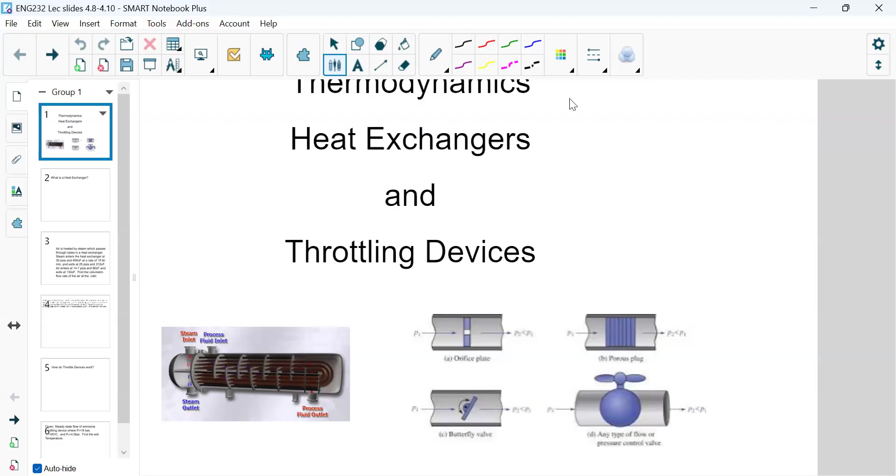All right, so you're gonna have to tell me. I thought we did a heat exchanger problem, is that correct? Yeah, we did like one. Maybe like that one. Okay, did we do this one with the steam?

Okay, I'm getting some no's in the classroom. All right, so let's go ahead and let's see. Got a table note, so do I have the table in here? So you guys go ahead and get the problem down and I will pull the table for this problem.

Let's do a freeze on that. Okay, I stopped sharing for just a moment. I will be back. I'm just pulling up this steam table and it was freaking out. Zoom gets upset if I move away from the Zoom screen.

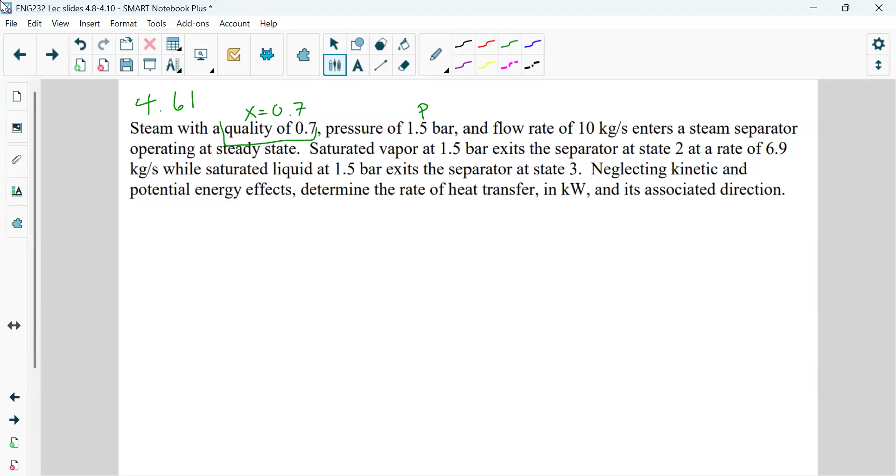Has a pressure of 1.5 bar and a flow rate. The word flow rate, okay, pressure is P, but the word flow rate, what does that mean? What are we looking at then? We are looking at M dot.

Enters a steam separator operating at steady state. Saturated vapor, now do we still have a quality? No, because it's saturated vapor, it's 100% vapor. 1.5 bar exits the separator at state 2 at a rate of 6.9. So this is another M dot.

Saturated liquid, meaning we're all liquid, correct? Exits the separator at state 3. Neglect kinetic and potential energy. Determine the rate of heat transfer, so we're going to want to determine Q dot and its associated direction.

So what's happening here? Let's go and draw a picture. I'm going to draw it like this because I've got steam leaving and I have liquid leaving, and then I have a mixture entering. So here at our entrance, what do we know?

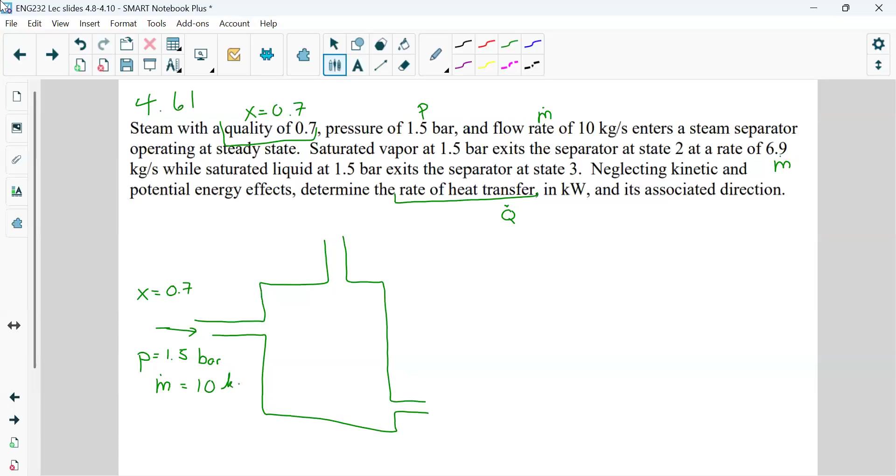Well, we know X equals 0.7. We know we have a pressure of 1.5 bar and a flow rate of 10, that's in kilograms per second.

So that's what's coming into it. Now what it's doing is separating it. So when it's separating it, we have the vapor coming out. So this would be my vapor then.

Okay, so a mixture is pouring in, vapor is coming out, and we know that pressure is 1.5. We'll call this 1, this 2, and this 3, based on how the book has things labeled. And we know this: M dot is 6.9.

When it says state 2 and state 3, that just means exit 2 and exit 3? Yes. All right, then what's coming out of here? This is strictly liquid.

And we're told that it also has a pressure, so we'll label this pressure 3 as 1.5 bar. We'll call this pressure 2, and we'll call this pressure 1, just so we can keep them straight.

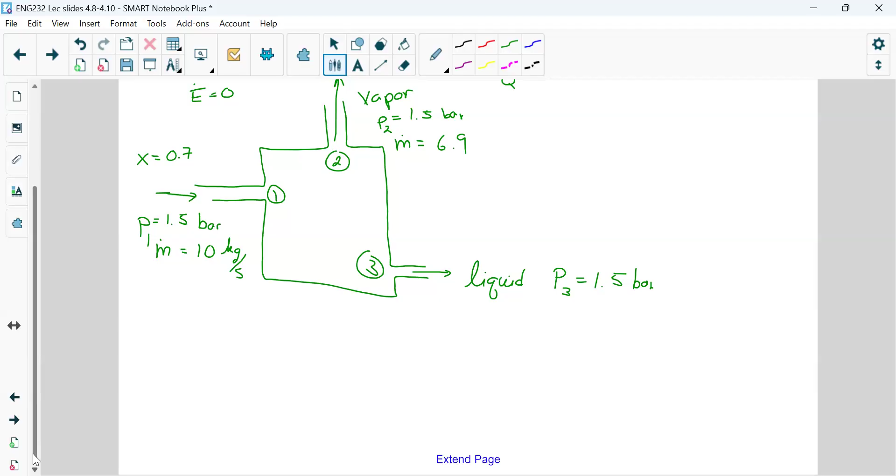So let's go ahead and write out our equation. E dot is going to be my heat, which is what I'm solving for, minus my work. And then I'm going to write what I have here, because the author plays games with these signs, it drives me crazy. Oh, that needs to go on the inside.

All right, let's talk about this and we can then move forward. So we already said we're at steady state, so this is going to go to 0. Is there any work being done on this system? A resistor, a paddle? No, so this is going to go to 0.

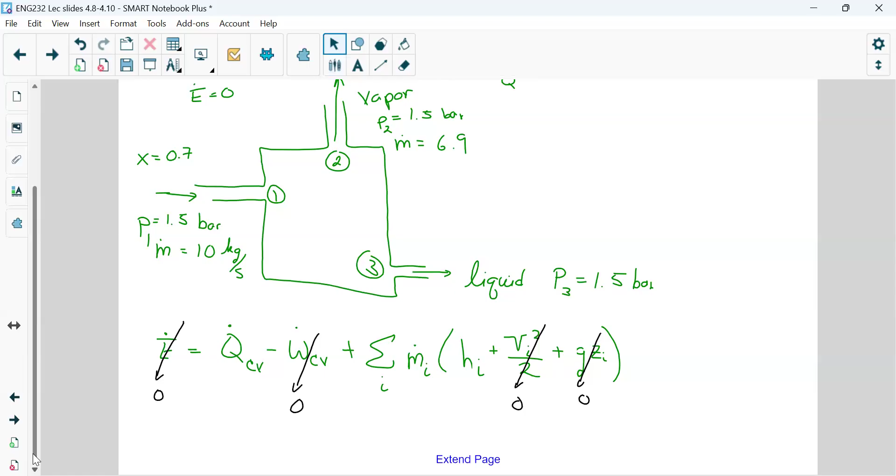We were also told there were some things we can neglect. What can we neglect? Kinetic and potential. So both of these are going to go to 0, correct? All right, so let's see what we have left. We have left Q dot CV, that's what we ultimately want to solve for.

By the way, what does CV stand for? Control volume? Controlled volume. What did I hear? Ben, what did you say? Anthony, what did Anthony say? Didn't say anything. Constant volume? Constant volume, okay, I thought I heard impossible. I said constant too, but I thought it was wrong. If I turn my hearing aids up any louder, I'm just going to put them on a different setting.

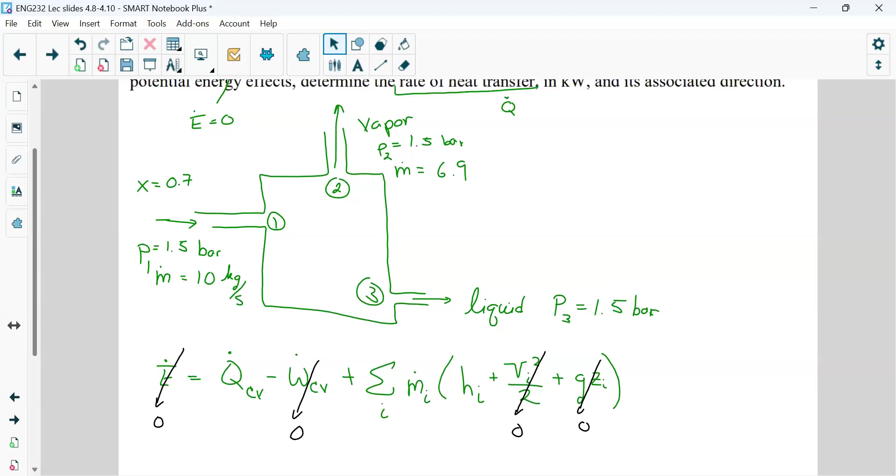All right, so let's go ahead then and talk about what's going in and what's going out. So coming in, when we now deal with this scenario, what do we have? We're going to have the rate at M1, and then we're going to have the H at 1, correct? And that's what's coming in. We're going to subtract what's going out, so we're then going to have the mass rate at 2, and then we're going to have to deal with our mass rate at 3.

Some of these are going to be easier to go after than others. Hey, I took attendance, so check in with me at the end of class.

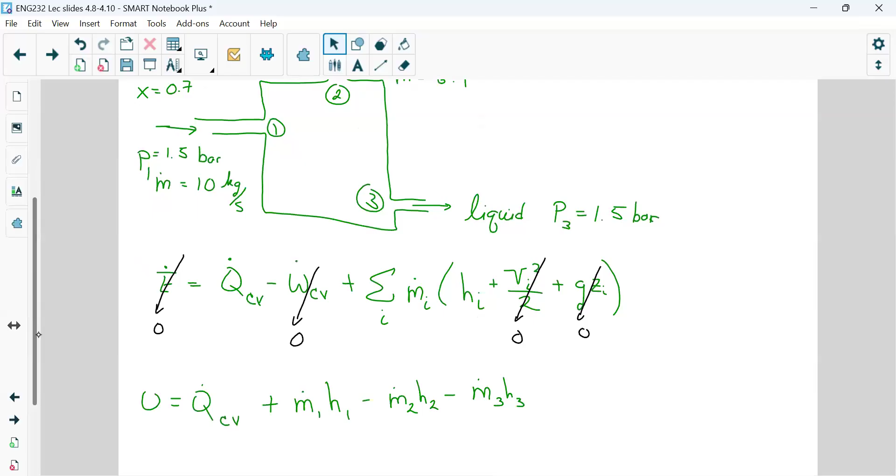All right, we know it's got to be leaving the system. So it should be negative then, correct? Yeah, but let's solve it first. If you just keep your signs consistent throughout the problem, we're gonna solve it, then they'll work out at the end.

All right, what else do we know? Well, we know conservation of mass, don't we? So that means M1 has to equal M2 plus M3, correct?

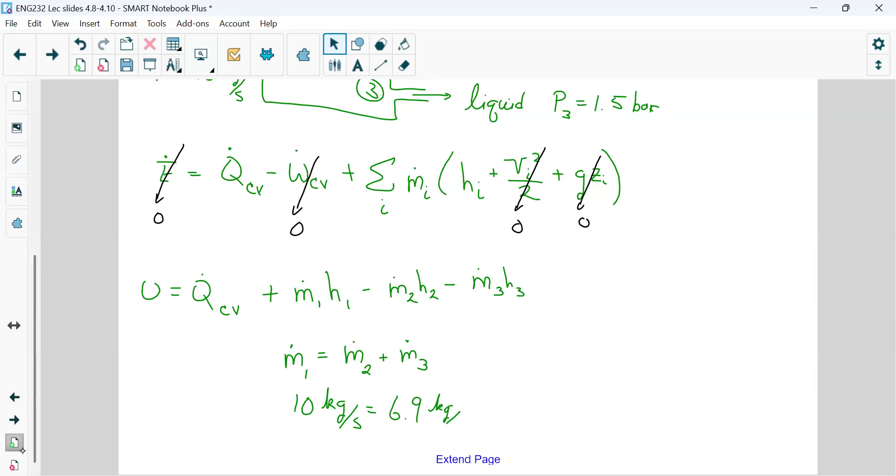The H's, we're gonna get off the table. All right, so let's figure out what our M3 is gonna be, because that was not given. So M1 is given to us as 10, and this is in kilograms per second, is then going to equal... 6.9 kilograms per second plus M3.

There is a dot there, I was told that doesn't always show up virtually. All right, so if we subtract them, then M3 is going to be 3.1 kilograms per second, correct? Yep, all right.

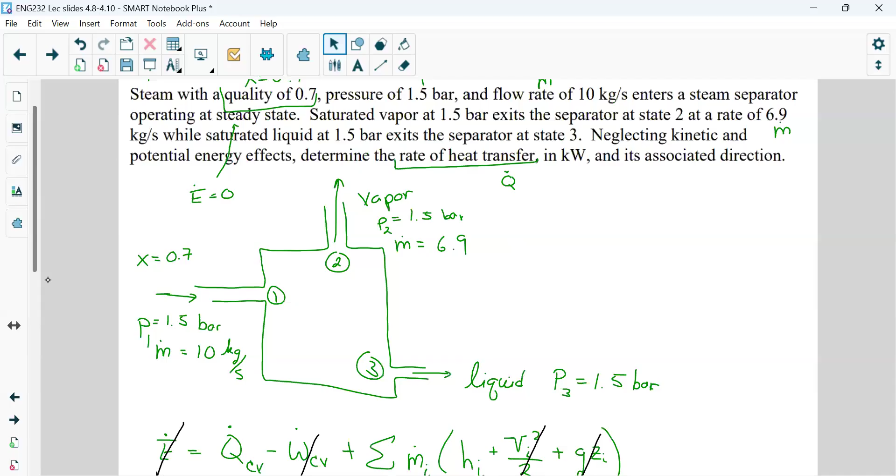So let's go ahead, now we have M3, we can go after the H's. Everything is happening at 1.5 bar, isn't it? So if we look at our property at 1.5, our pressure here is 1.5. We have our volumes, but let's go over here because this is what we care about. Here are the H's, correct?

The 461 is my fluid. 467. 467.1, right? That's gonna be my fluid.

Now, this is why I wanted us to do this problem. Let's talk about what H is and what this means here. All right, so physically, H is enthalpy, which is how much heat it can absorb before it changes state. When we do this, because enthalpy is a little different, we're gonna wanna use this as our upper side for the in-between.

So this is going to be H3, which is 3, that's the stuff coming out the bottom. This is gonna be H2, that's the steam. All right, I'm gonna have to use these two numbers because H1 has to fall between those two numbers. And that's because of our X, right? That's because we're given X as quality.

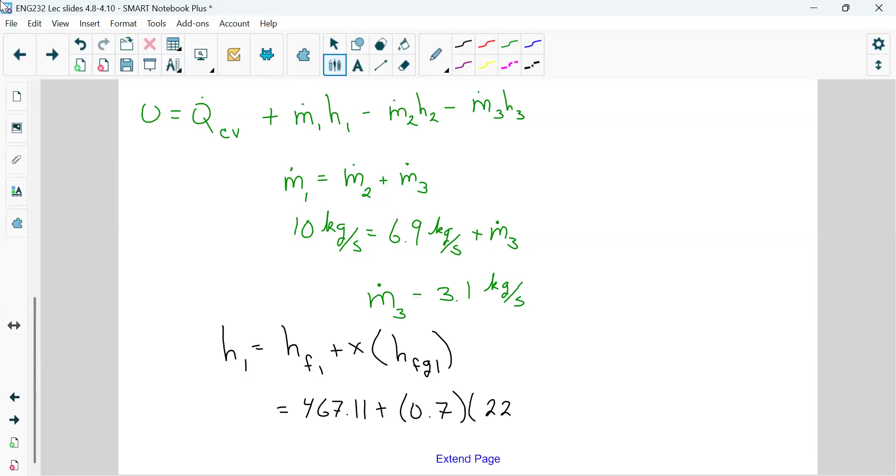All right, so the fluid was what, 4? Did anyone write the numbers down? 467.11 plus my X was 0.7, and the other one was 226.5. Try it again. 226.5, there's two 2's, 0.5. All right, excellent.

All right, so plug it in your calculator, what do we get for H1? Like 2025? 2025.66. All right, 2025.

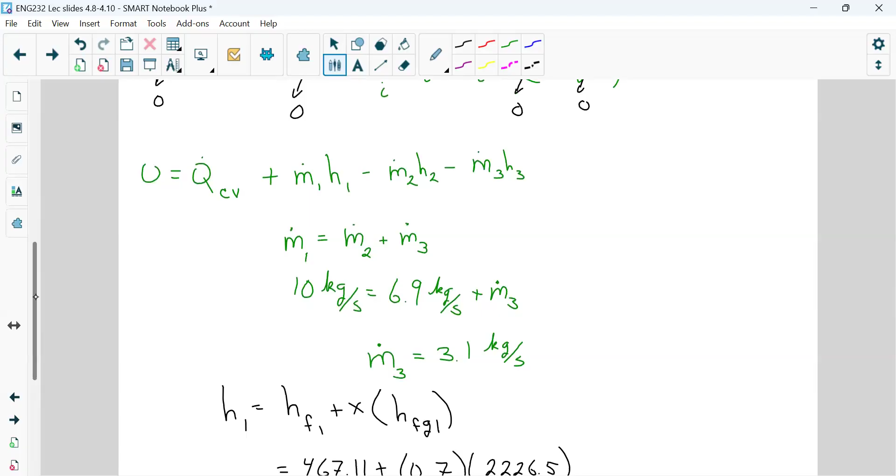All right, so let's head back to our equation. We're then gonna have, we know our M1 is going to be 10 times 2025.6. We're then going to need to subtract our M2. Now, our M2, we said was strictly vapor, so we can pull that off of our chart, can't we? So that's gonna be the 2693 number, correct?

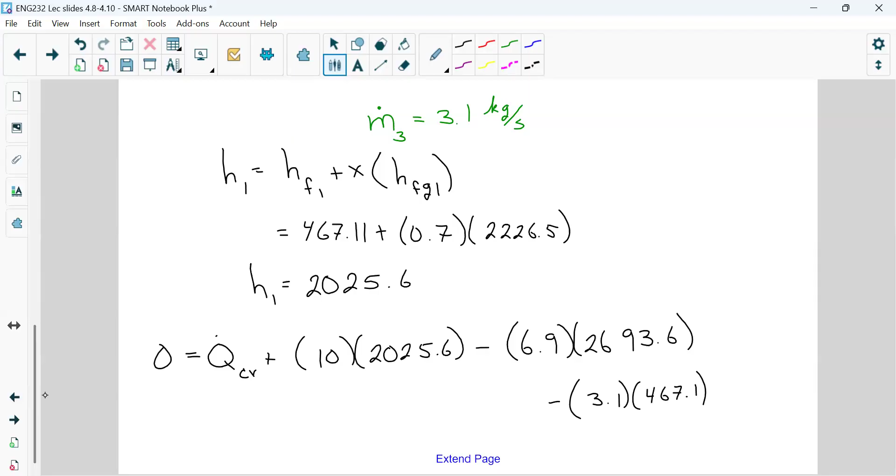All right, we're then gonna have our fluid number, which is the 467. So this is then gonna be 3.1 times 467.1. Nice and loud, what's wrong? I'm confused where that 2693 came from. It's our HG, right? Did I write it wrong? Oh, it's 2693, oh I didn't see that. Okay, oh no, I'm okay, yeah, I'm okay, all right.

So what happens when you plug this in? I'm gonna move this to the other side. Right, plug that all in, and what do you guys get? Minus 40,291. Oh, the first one's a plus? Okay, I did that wrong. Okay, because I'm like, that's kind of crazy. Yeah, the first one's a plus because it's going in, the other ones are minuses because they're leaving.

Anyone get 222.7? Gabriel, is that what you got? I got 222, I think I might have... Oh no, that could be it, could be a rounding error on my part. Anyone else do it? 222.719. Oh, okay.

All right, now this ended up being positive. We're gonna move that sign over. Ben was trying to figure out the sign before we did the problem, which you could use as a check. By the way, units on this are gonna be kilowatts.

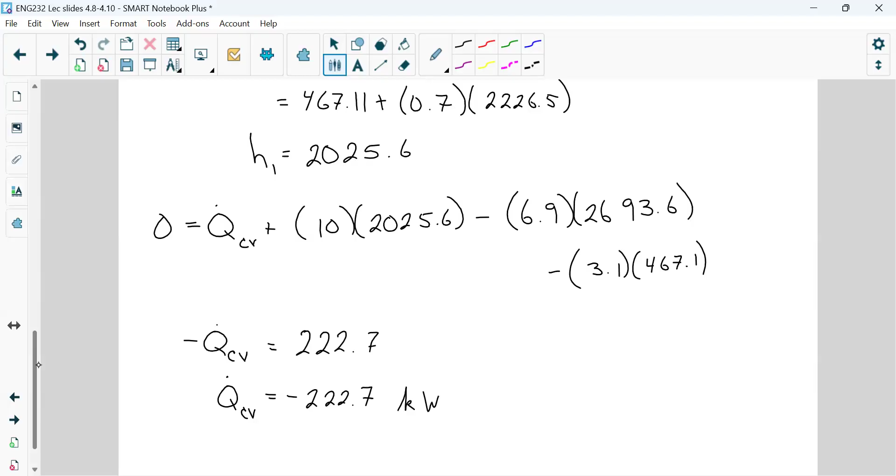Right, questions on the problem? Yeah, I do. Why in that form to find H1, why do you have to add the enthalpy of the fluid plus the gas mixture? Okay, so, I should have printed this out because you guys make fun of me about this.

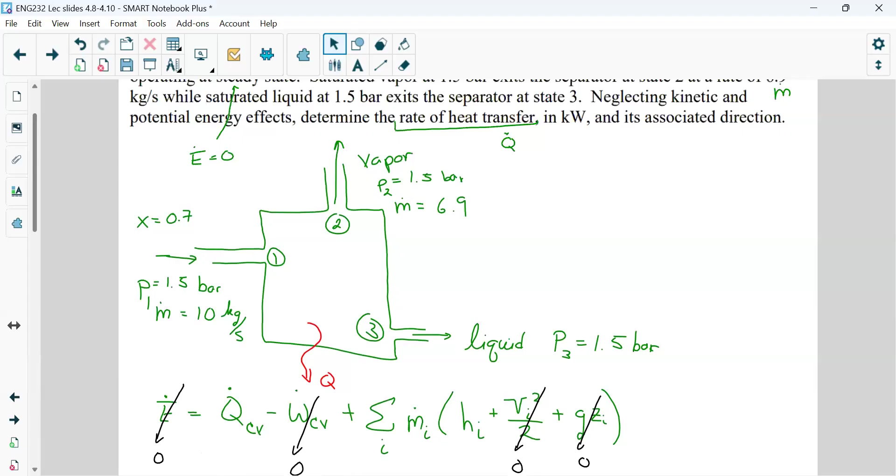Quality, right? That's gonna be H1 minus... H fluid, thank you, okay. H gas minus H fluid. So that's why. The table gives us this, it gives it as what's in the parentheses, right?

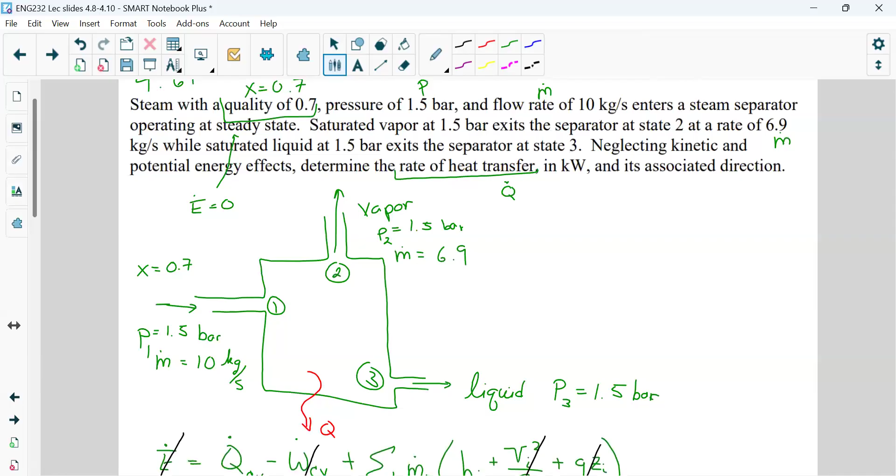Okay, I get it. So on that note, we said that HG and HF were H2 and H3, right? Yes. Okay, I was just making sure. So whatever pressure it is, well, the thing about the pressure is if the pressure had changed, this problem would be a lot more exciting. But the pressure is constant throughout, right, Jeremy? Right. So because of that, we are literally only dealing with this particular table.

So if it's pure liquid or pure vapor, you just use those, but you need to find the enthalpy of the mixed region basically. Right, we don't know where we are in the mix. Right, that's why we had to use the equation to solve it using the quality. That makes sense.

Right, and that X works for everything on that table, right? Like if we needed internal energy, we can use that X value too. Well, what's awesome about the quality is it works, and hopefully we're gonna get into this today. Yeah, we will. All right, it worked, we found it worked with volumes, didn't it? We also can use it for internal energy. We also can use it for enthalpy. We're also gonna be able to use it for entropy.

So X works no matter what quality, or no matter what I can't find the word, it'll pop into my brain. No matter what property we're looking at.

Yes. If we weren't given the mass flow rate for 2, could we have used the quality to figure out the amount of steam and just assume that would be the flow rate? Knowing that's gonna be about 70% steam. Yeah, okay. I would be careful about doing that, but you could do it that way, you could think of it that way. It's gonna work out.

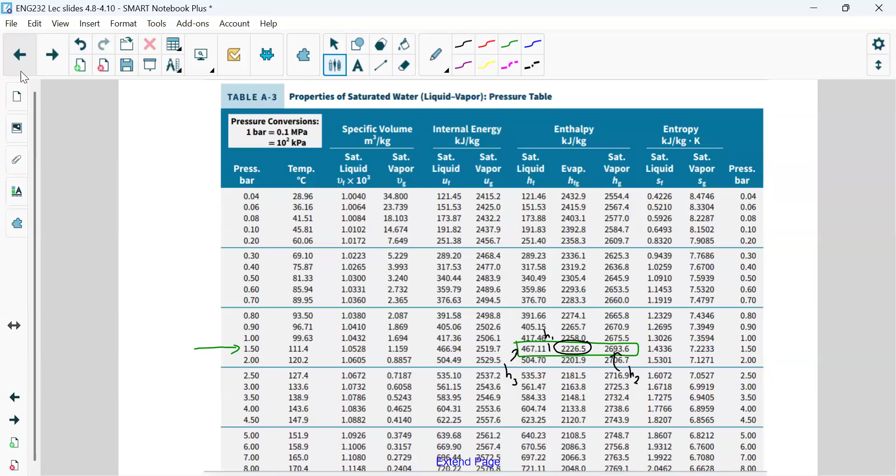Okay, all right, so, like, I understand how to find them, but I don't know when and where, and if they can be used other places. Okay, so this is where I think the biggest confusion for the tables come into play. And that is the fact is you need to know where you are.

Here, you're at saturated liquid, meaning it's all liquid, right? Here you have a mixture. Here you have saturated vapor. What I tell students, and this works most of the time, is start, if you don't know which table to use, start with the mixture table. If what you're looking at with what you're given falls outside that mixture table, then figure out are you vapor or liquid, and then go use that table.

Yes. When you're saturated liquid or saturated vapor, you're on the line. Well, yeah, when you're saturated vapor, you are on this line here. So that's your VG. Okay, unless, and this is why you have to look at it.

Let's go back one. Let's say we're given volume and our saturated vapor at 1.5 is 1.159 for water. Let's say it's at 3. Can I use this table? No. This table only works when the volume's between 1.05 and 1.159. Or if you're given internal energy, these are the internal energy values this table works for. Or if you're given enthalpy, that's the enthalpy that this table works for.

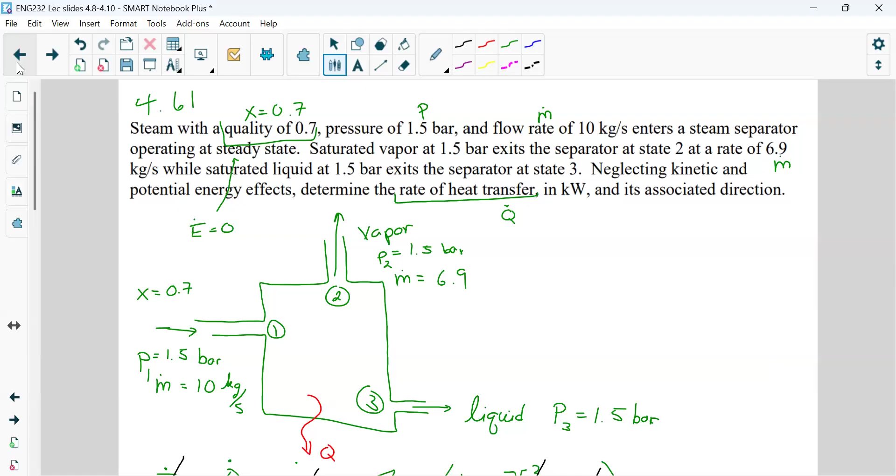This problem starts, Gael, by telling us we're given a quality. So that automatically means we're going to be on the A2 or A3 steam tables. Okay, we're not on the A2 because we're given pressure instead of temperature. Yes, Valerie, I think it's also important to figure out what equation you need to use to solve it, because if we know we needed the equation you wrote down, we know, oh, I need to look for enthalpy in the table. Right, so unless we're dealing with ideal gas.

Yeah, and things are gonna get a little different, hopefully today, maybe not. Entropy is gonna be different. We're looking at this equation. Yeah, but earlier in the semester, I was using change in internal energy equals Q minus W, because then you're looking for U in the table. So, correct, it depends on which formula you're using. Right, but what's the difference between those two equations?

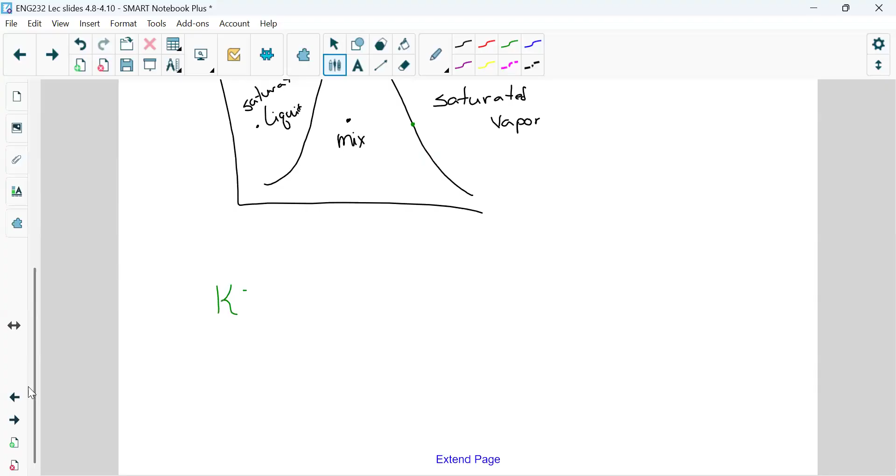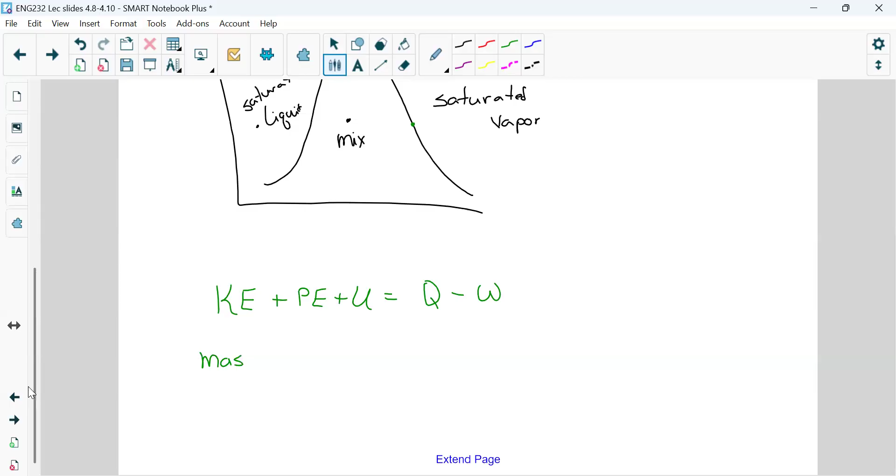No mass moving out of the system or in the system. No what? Not no mass. Mass, right? Mass flow rate. If we have this equation, nothing is moving. So in the beginning of the semester, stuff didn't move. All right? If we're told mass is flowing, then we're going to have to use this equation.

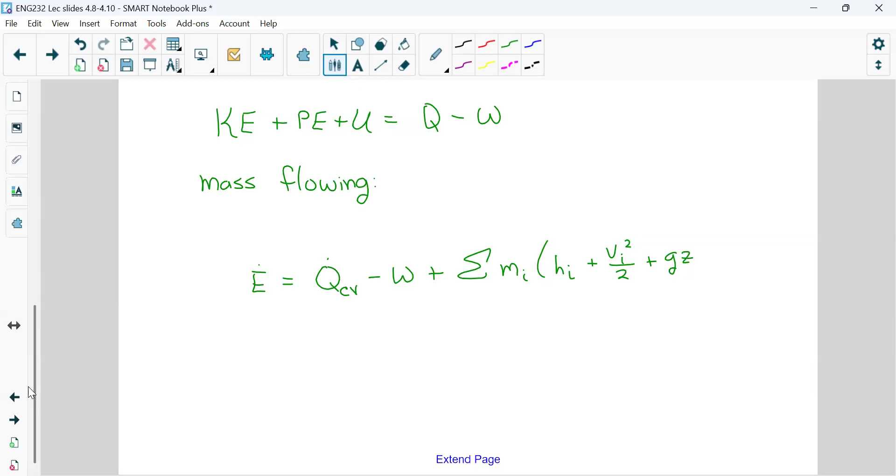Let's go back to our open, closed, and isolated systems. Closed and isolated systems won't have a flow rate, so yes, it does go back to it. All right, if it's closed or isolated, it's gonna have to use this, correct?

Because mass is not moving in or out. If it's closed and isolated, then what else? If it's adiabatic or isolated, then Q is gonna be 0. All right, so that's the difference between using these two equations.

Does that help? Gael, does that help? Honestly, not really. I know what tables to look at, and I know when to use which formulas.

I think what trips me up the most is like, for example, if we have the equation on the bottom. I don't really know how to explain it, but I remember in the exam also I didn't know whether to...

Please do not discuss the exam. I have a couple of people who asked to take it late, and since I wasn't in town, if there is a problem with the exam, Gael, we're gonna have to meet in office hours for that at this point. I wasn't gonna go into specifics of it, but if that's okay, we can talk about it generally. Yeah, we can talk about it in office hours. Okay, never mind then.

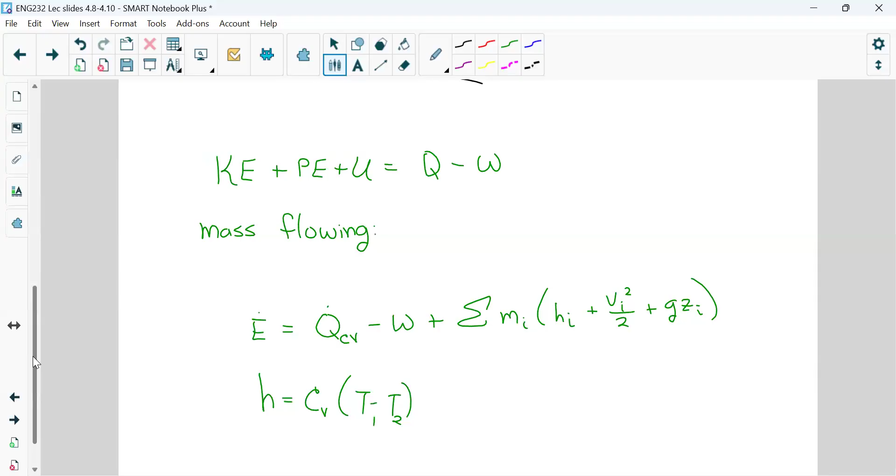I remember when I was doing the homework, I would get tripped up also on when to go all in using the formulas or just keep pulling values out of the table, because I felt like it just made sense to pull values from the table and plug them into whatever formula. But in some cases I could also solve for the value I was missing, so I wasn't sure what to do. That's my biggest confusion, when to pull values and what values to use and what not to use, stuff like that.

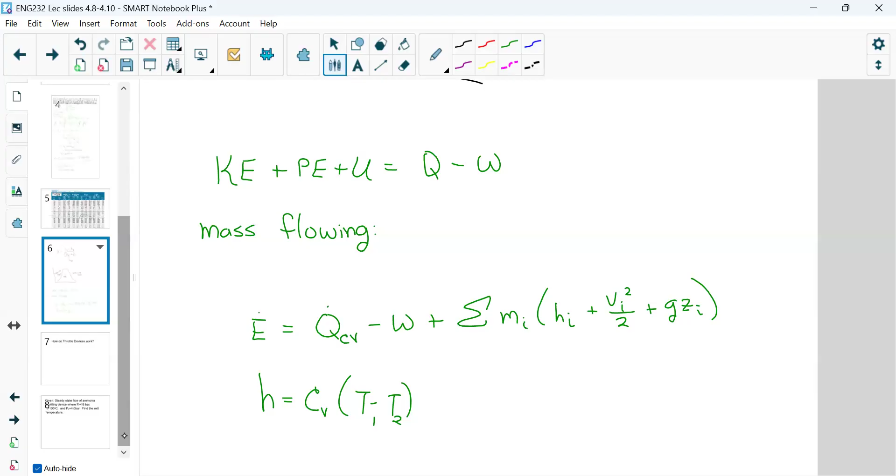I think we're gonna have to sit down and look at some problems in particular in office hours if you want, because I really kind of need to get to this today.

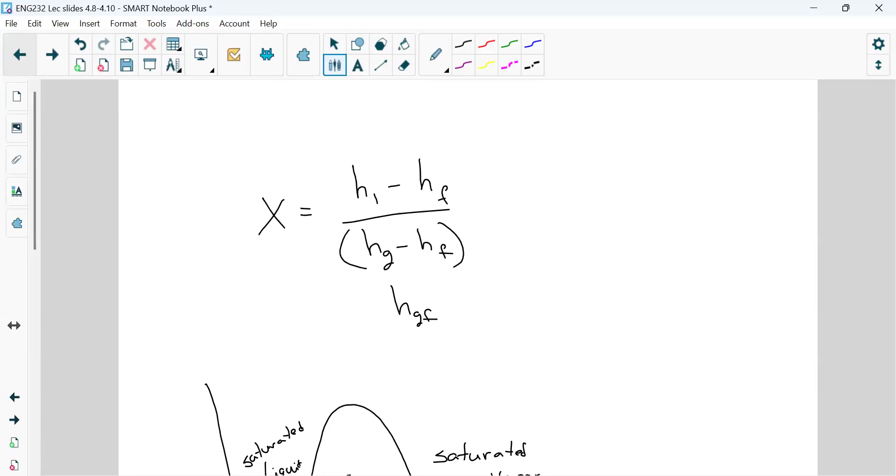Let me check real quick. Yeah, that's right, CV is U, CP is H. I don't even know where I wrote it down. It's right, okay, so it should be C sub P, meaning we have a constant pressure, but we're looking at specific heat - if you're given specific heat, you can calculate H and U.

If you're not given that information, pull it from the table, or if it's something that isn't on the table because it's not a fluid or a gas that we have information for, correct?

All right, so let's talk about throttling devices. Throttling devices change what? What are they gonna change? Velocity, they're gonna change that flow rate, aren't they? Right, so they do not provide energy.

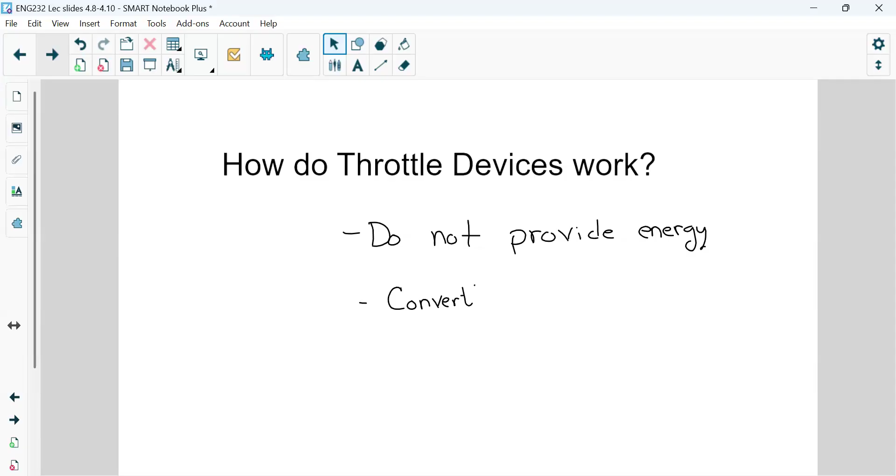What happens is, and I'm gonna use the word convert, which is not the best word to use but we'll go with it, they're gonna convert pressure energy right into thermal energy.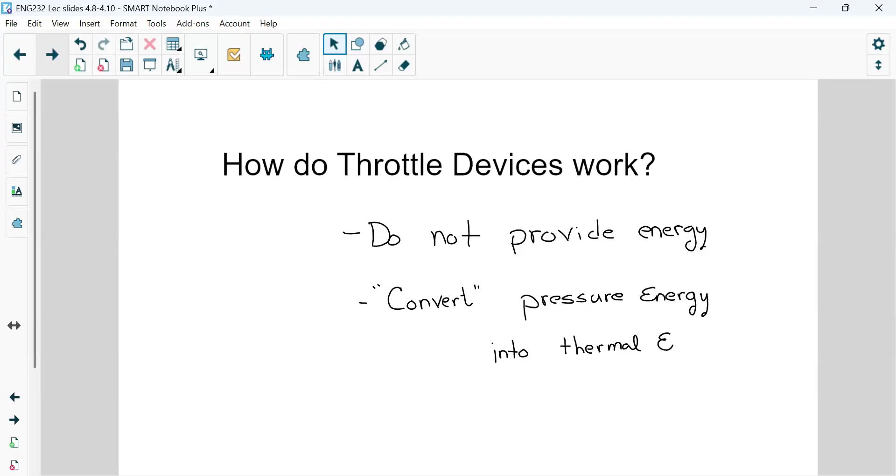This is the biggest key. This is the key words you're gonna look for when you do a problem to tell you it's a throttle device, right? Large, irreversible, pressure drop. The keyword there is irreversible.

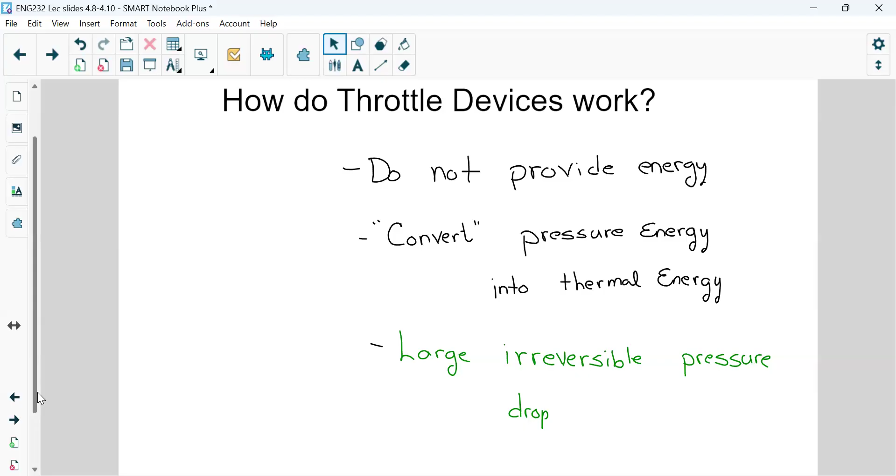Got a problem and it's missing the keywords, but that's okay, it tells us it's a throttling device. All right, so I need to grab a table for the problem. We'll talk about why we grabbed a table for the problem based on what information we have. So go ahead and get this problem written down.

I do not have it in my notes if this came out of the book or if I pulled it from somewhere else. Okay, so give me a 7 when you get this down. As I said, I need to grab a table, and I'm gonna grab the table for this.

First off, it's ammonia. So Gael, let's walk through this. If it's ammonia, am I gonna use any of the steam tables? Yes or no? Wait, no, not a steam table, I'm not gonna use a steam table. I'm gonna have to look for a table that is what? All right, I'm gonna have to look for a table that's ammonia.

Actually, you know what? Let's walk through this together. Let me know when you have this problem. Let me know when you have this problem down.

Is this kind of like a diffuser because the pressure's dropping? No, because the pressure's dropping due to something blocking it. On a diffuser, the pressure drops because you have a change in surface area.

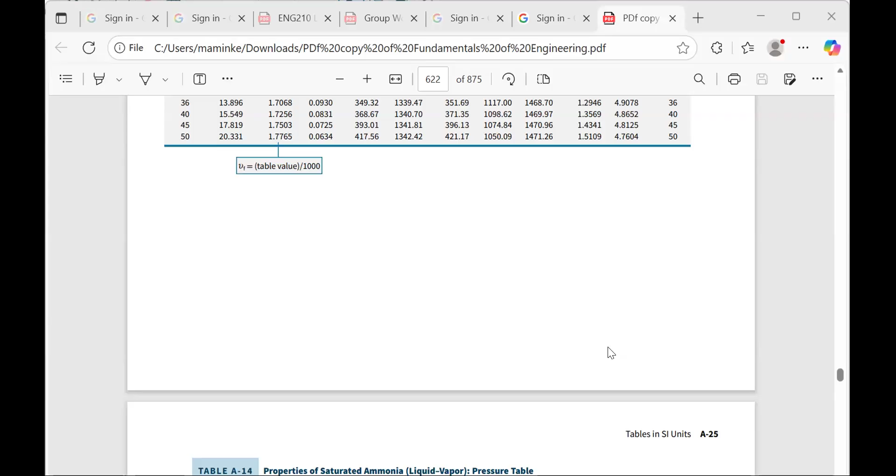Based on what you're saying, wouldn't it be more like a nozzle? Because you're having a change in area. That's correct, it's just a different case—you still have a change in area. Physically, a nozzle or diffuser behaves differently than a throttle valve in the field. You can look at them as being the same for this class, but when you take fluid mechanics, they'll be different.

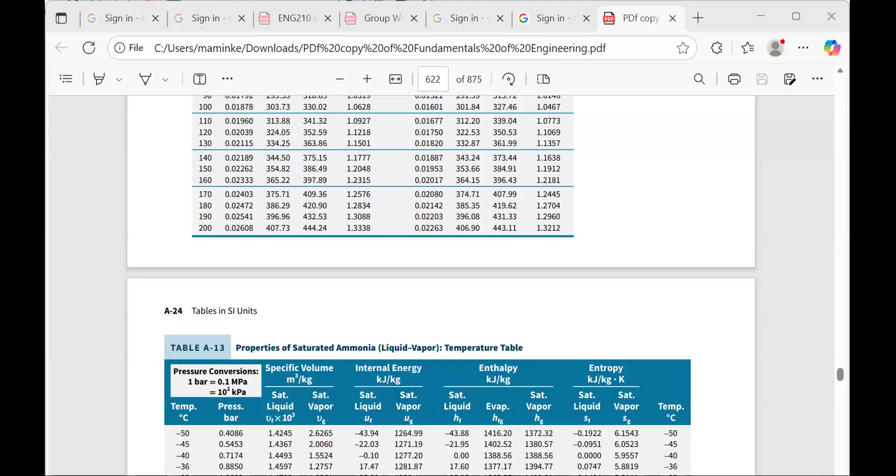All right, first thing, Gael, are you with us? This is for you. Yes.

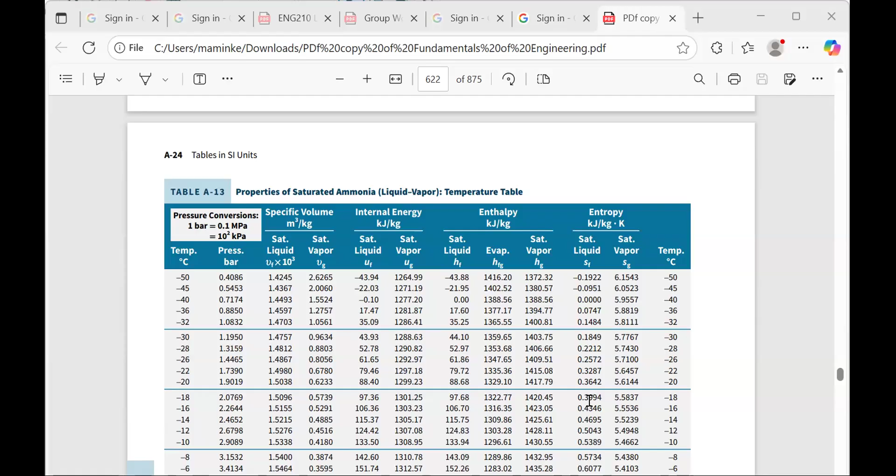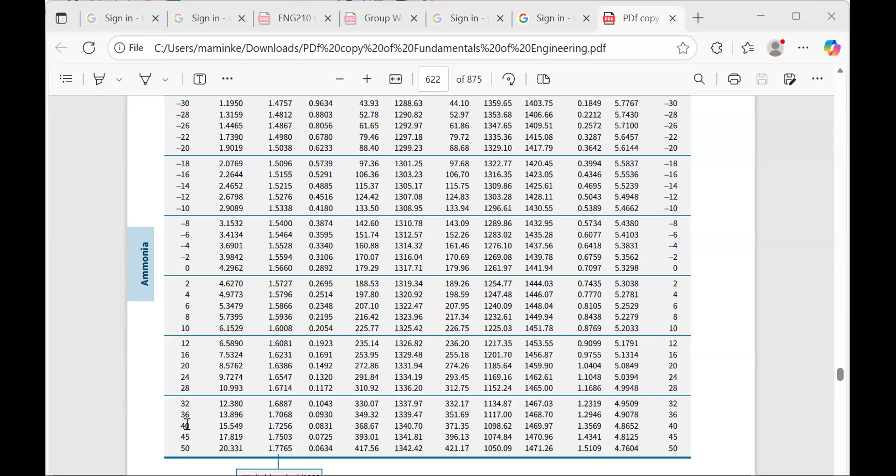So first thing is I have ammonia, so I need to go to my ammonia table, correct? I'm given two pressures: we're going from 16 bar all the way down to 4 bar, and in addition we're at 100 degrees C. So we're looking here, 16 is roughly this number—would you agree for a pressure? And we're at 40 degrees... that's going to be a problem for me, isn't it?

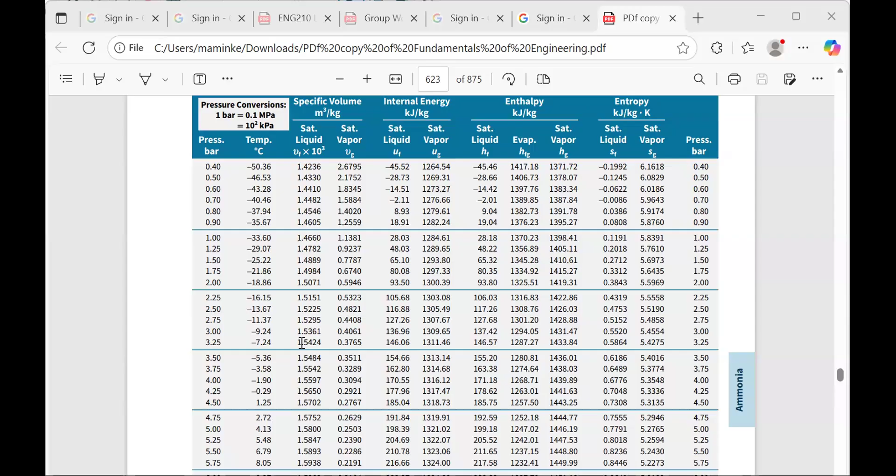If I go to the pressure table here, at a pressure of 4 bar, this is negative 1.90—do you see that? So if this is my pressure and that's my temperature, and I'm at 100 degrees C, can I use the mixture table? No. Am I going to be a liquid or a vapor at 100 degrees C? So superheated ammonia, right?

If I have a pressure, now we're looking at this pressure, 2.5, 3—here is my 4 bar, correct? So here is what happens at 100 degrees and 4 bar, and at 16 bar and 100 degrees. Yeah, 4 bar is the exit. Okay, so 16 bar—here we go, 16 bar and 100 degrees. Right, we're coming in here, aren't we? All right, I'm going to pull this table and put it on the other slide.

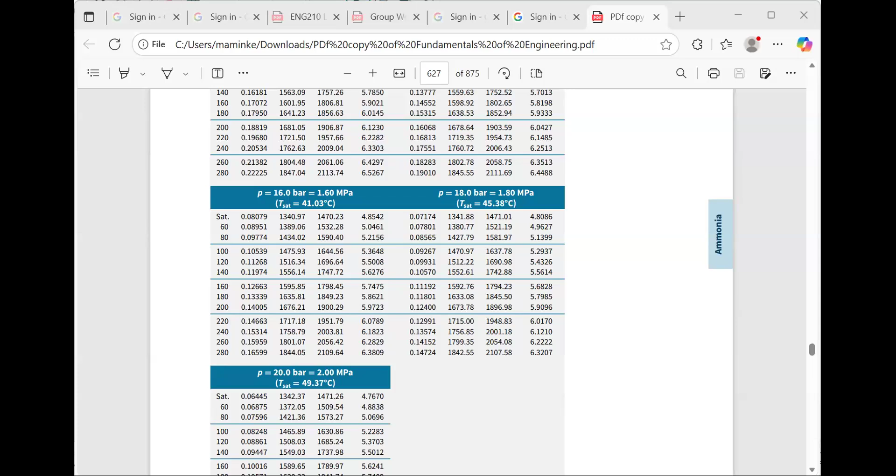Did you understand the logic I used? Maybe that's part of the problem—you need to use logic to figure out where you're going to be with these. It's not just a formula you can use. So let's go back to here. Let's reshare with the Zoomers.

So coming in, we know we're at 4 bar and we are at 100 degrees C. No, 16—I'm sorry, this is actually a poorly worded problem. That's fine, we're at 16 bar coming in, and we are here at 100. So what is my H going to be then? 1644—all right, it's going to be that 1644 number.

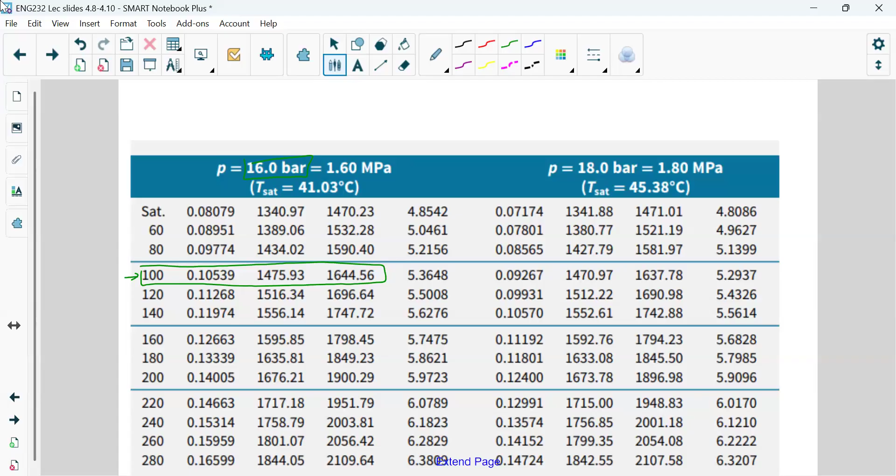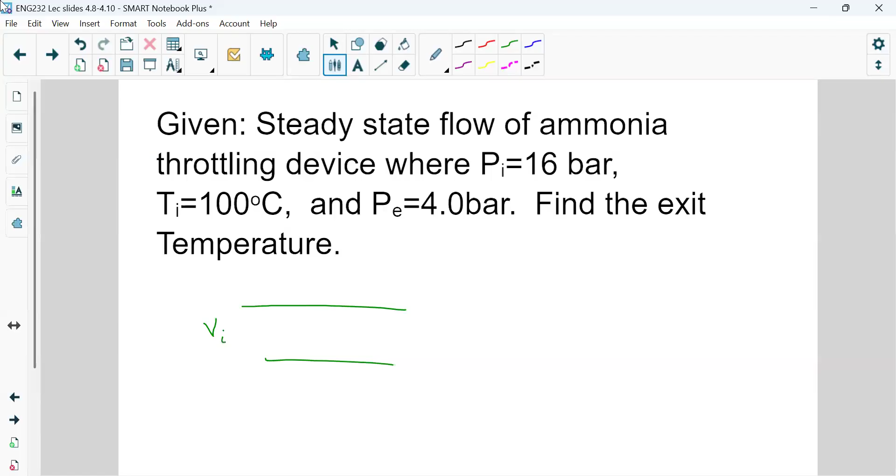Okay, let's go back to our problem and talk about what's going on here. We have a throttling device. We have stuff coming in, something happening here causing it to throttle, and then stuff exiting. Velocity in, velocity exiting—we have information about what's coming in. This is 16 bar, temperature coming in is 100 degrees C. What else do we know that's coming in? Off the table we can get 1644.56.

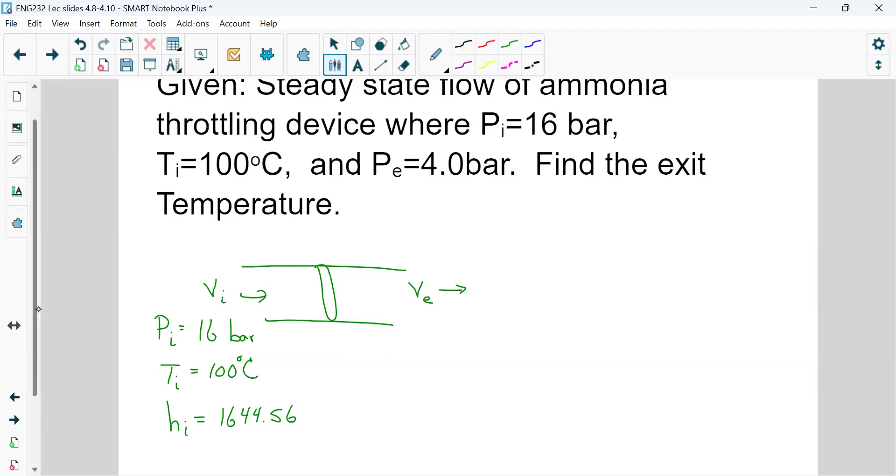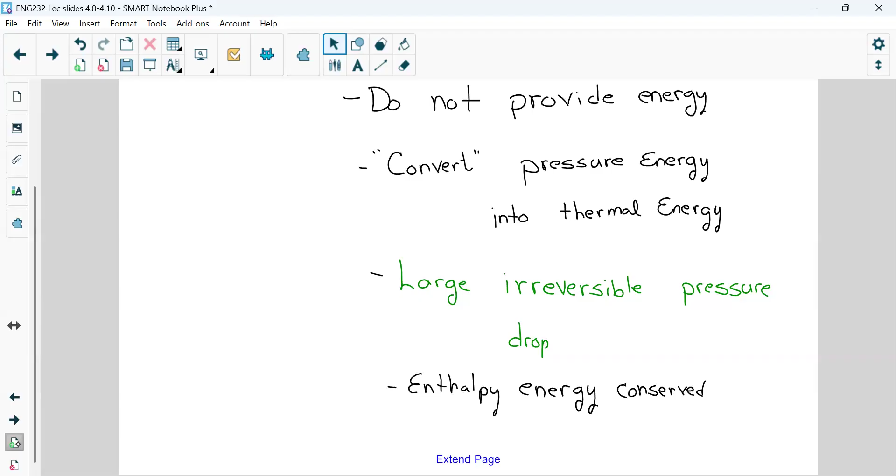What I should have written on the previous slide, which I didn't, is that when we have a throttle device, internal energy is conserved—sorry, enthalpy is conserved. Why is that? It's because the pressure energy is being directly converted into thermal energy, so your enthalpy isn't going to absorb any of that energy—it's going to be released as heat.

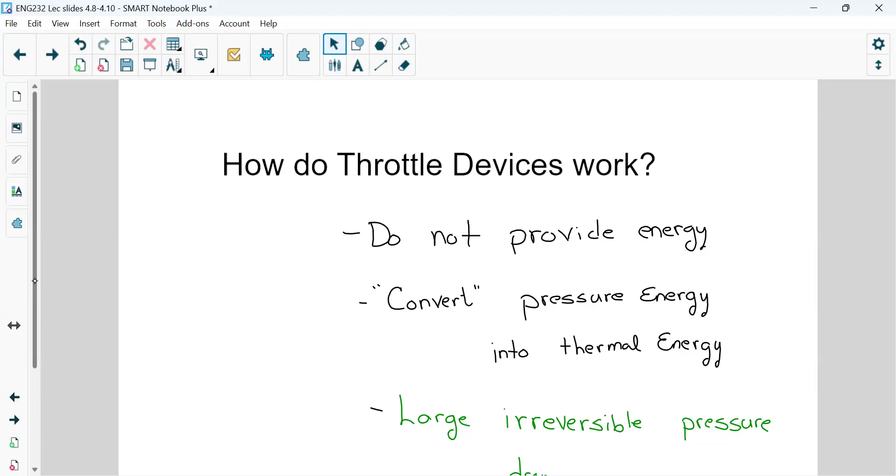A throttle device is literally just a device with an opening or adjustable valve that can adjust pressure and speed, right? So these are our throttle devices. Is my thumb on a hose a throttle device? Yes, when you put your finger over a hose, you're creating a throttle device—didn't you have to do that for one of the pre-class quizzes? When you step on the gas in your car, you're also changing a throttling device, because the valve opens to let the gas out—unless it's electric, in which case it's just electric.

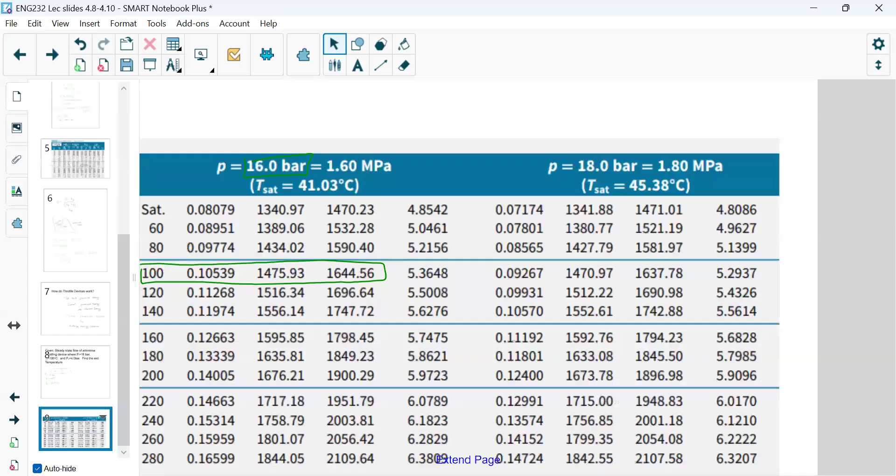All right, so my H is conserved. Because of that, I know my pressure at the exit is 4 bar.

I don't know the temperature at the exit, but the enthalpy at the exit has to be 1644.56.

I thought this was a much more difficult problem, so I actually did the analysis to figure out the exact answer, because this isn't going to be exact on our chart. So we know we're now at a pressure of 4 bar.

If we go back, I'm just going to grab it. I'm not switching slides, so hang on, Zoomers, I know you can't see what's happening. All I'm doing is heading up to 4 bar.

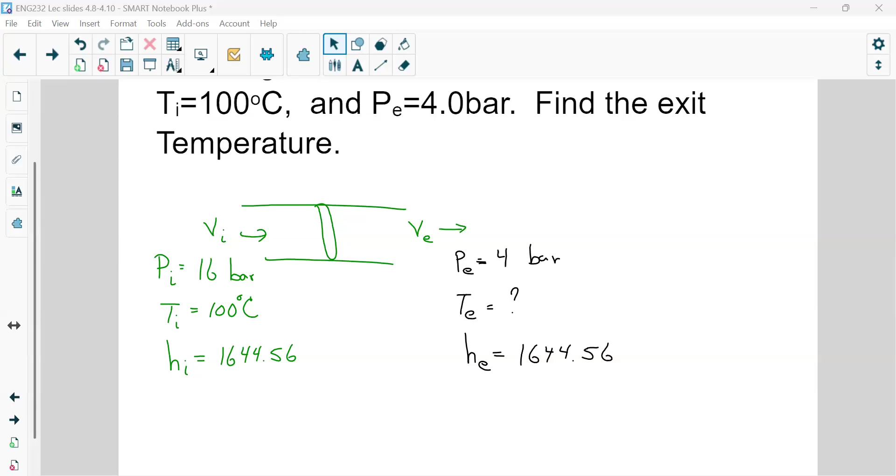We should keep enthalpy where it is, the internal energy's going up, the volume's going up, because enthalpy is related to delta U plus PV, right? So that could keep changing, but the H does not change, because it has to balance the equation outside: either the internal energy is going up or the volume's going up.

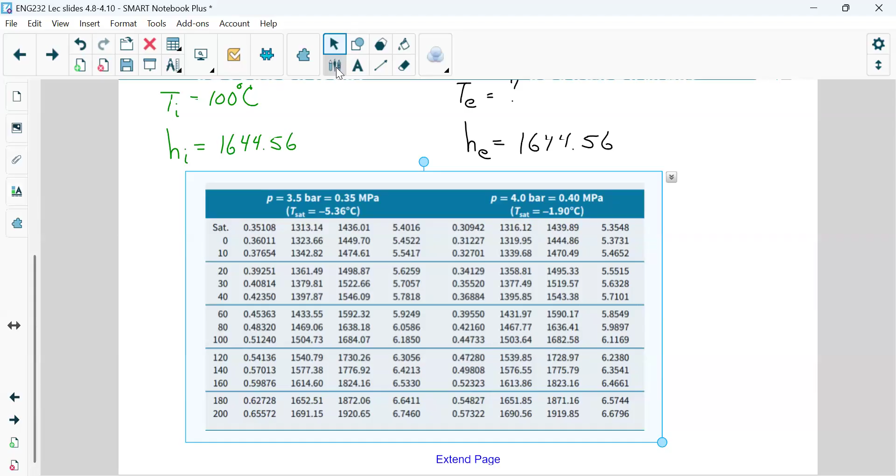All right, so if we're at 4 bar, and we're dealing... oh okay, I see what this is. Okay, and we've got this 16, it's going to be between these two numbers, isn't it? It's going to be between those two, correct?

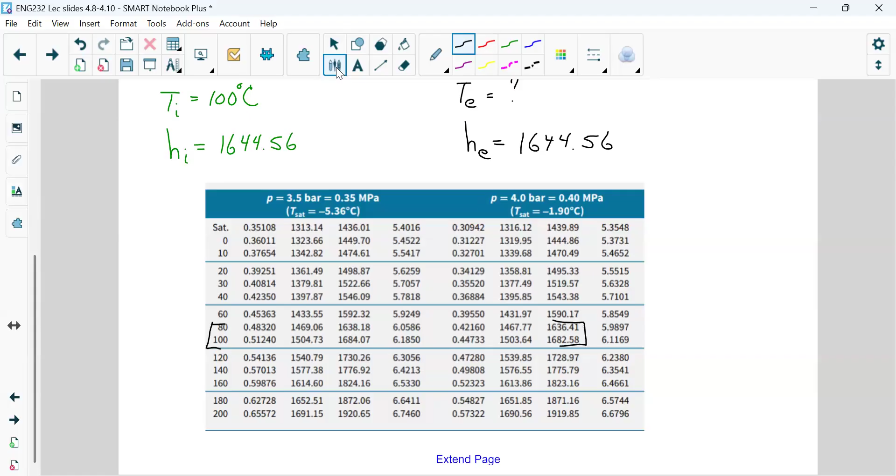I actually did the linear analysis in mind, but is it going to be closer to 80 degrees or 100 degrees? 80 degrees. So our temperature here, you're going to be able to put down to 80 degrees. If you actually do the linear regression, it comes out to be 83 degrees C.

All right. So I have 15 minutes, we're gonna use them.

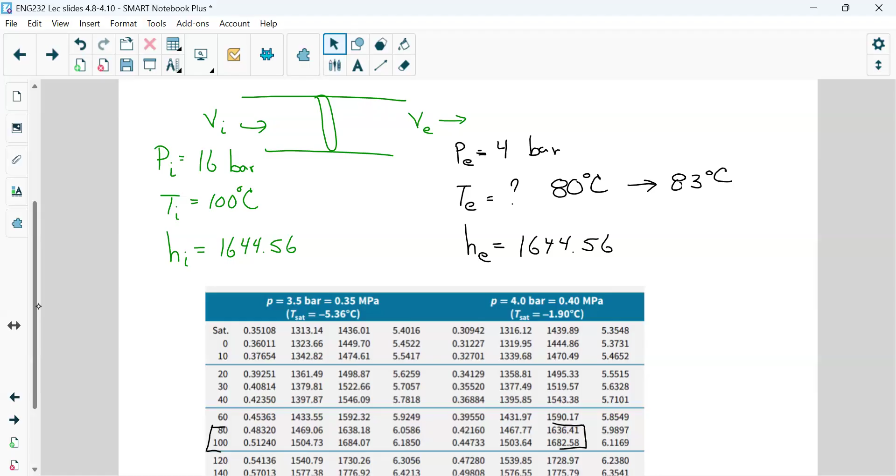All right, I do need to change slides here because I need to pull up a different set. So let's go ahead and do that. We want 5.1, 232.

We're gonna move into talking now about entropy. And I believe I owe you some homework worksheets, because I wasn't thrilled with the stuff in the book. I didn't think it was challenging enough.

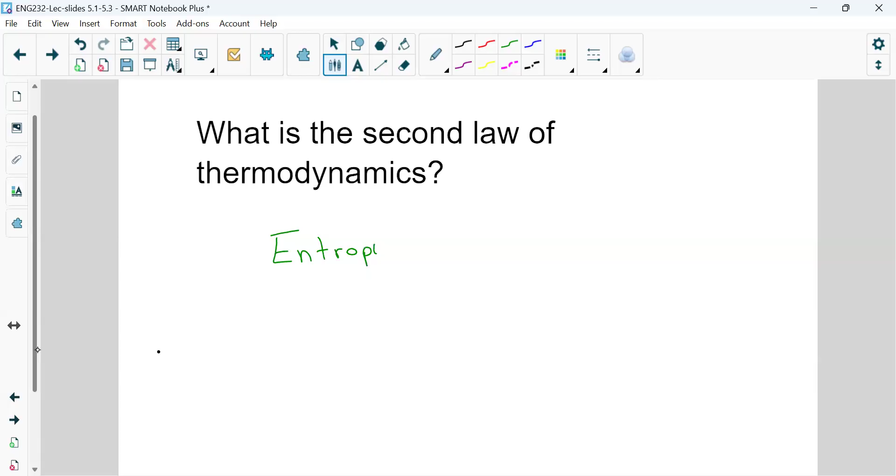We are going to look at the second law of thermodynamics, and that is the law that governs entropy. Entropy is another characteristic of our material. The second law of thermodynamics is that entropy will always increase.

Now, we got to be careful with that. That means entropy of an entire universe will always be increasing. The system might not, but entropy of the universe is always increasing. The symbol for entropy is an S.

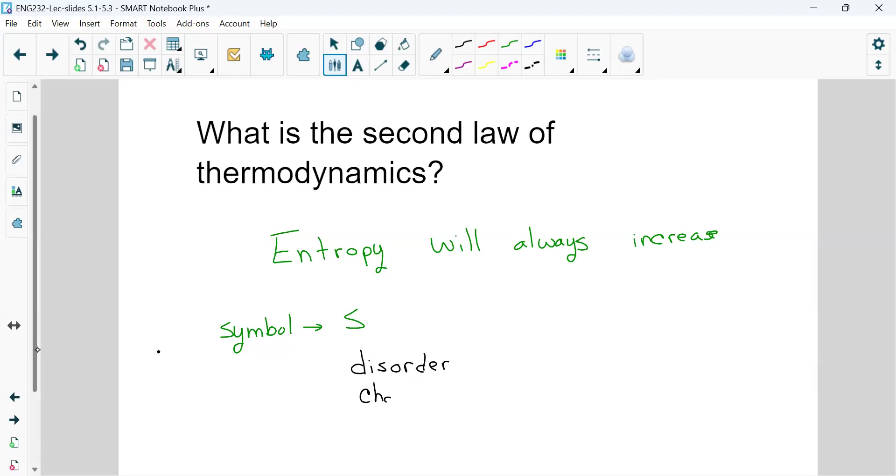Now what entropy is, entropy is our disorder. You can also think of it as chaos. And so when we're dealing with entropy, that's what we're looking at. There is, from a modeling standpoint, an entire field that does chaos modeling. It's actually really cool because they do develop patterns after a while. Chaos isn't really chaos because you will get patterns when you do chaos modeling.

It's kind of interesting, and I'm thinking about it, when I took chaos theory I wrote some computer programs, but I think that computer died a long time ago.

All right, so let's do an example of this. If I have a bunch of gas particles, and I'm inside, and this is a vacuum.

Sorry, I'm having a spelling delay. Vacuum, V-A-C, a W but not a double. Okay let's try it again, V-A-C-U-U-M. Okay, are you sure? Yeah, it's such a weird word.

All right, if I say I'm going to remove that barrier, what do you think those gas particles are going to do? They're going to spread out, aren't they? So when they spread out, we're going to see an increase in disorder. So this is going to be an increase.

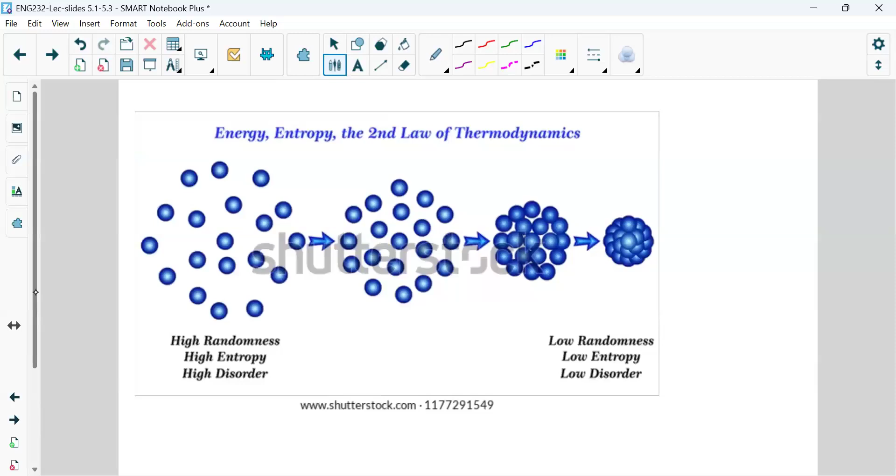All right, so let's review some vocab and look at reversible versus an irreversible system. When I tell you it's a reversible system, what does that mean? You can do work to it, and it can go backwards. Put in work.

If we have an irreversible system, and we actually just talked about this word, you know, you can't put the genie back in the bottle. That's an irreversible system, no way it can go backwards.

If you start with a pot of water and put it in the freezer, what's the pot of water going to do? It's going to freeze. If I pull the pot of water out and set it on the countertop, what is it going to do? It's going to melt and it will have not changed, correct? The volume will change because when it freezes, but we'll have the same total amount of water molecules.

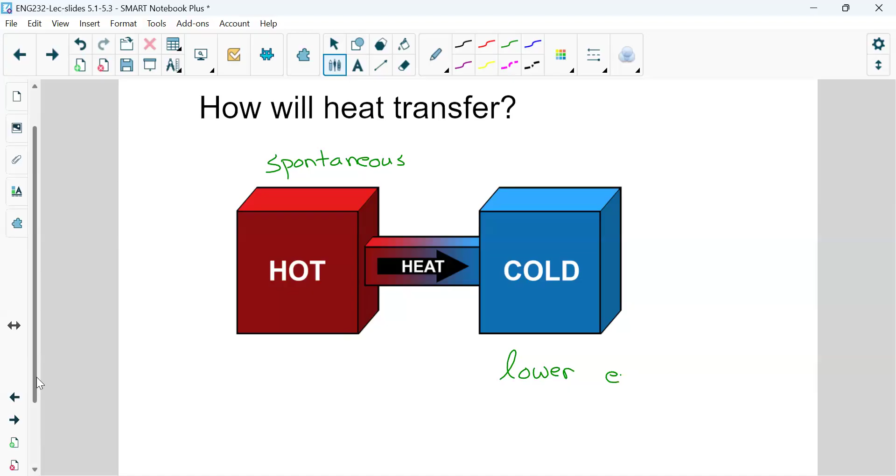Lower energy state, lower entropy state. So if we look at the universe as a closed system, I think it's estimated at 10 raised to the 26th is when the universe will have entropy death. Okay, I don't plan to live that long, so we won't worry about that.

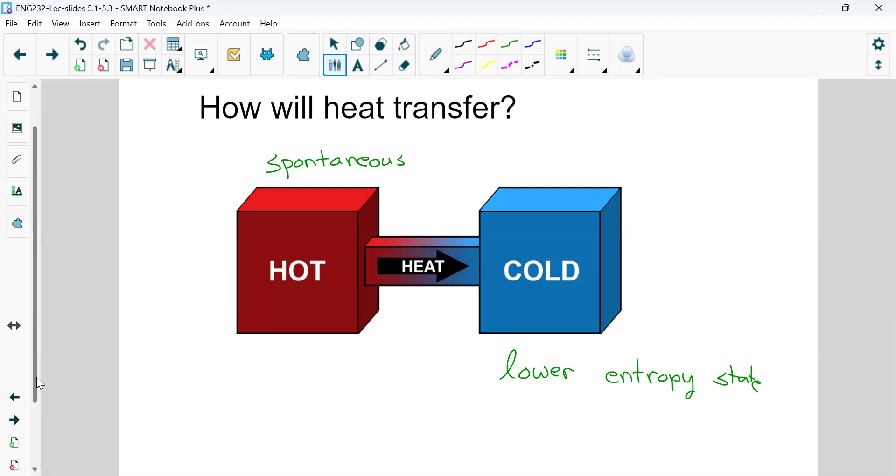Yes, do you know there's a formula for entropy? Is there a formula for entropy? Yeah, thank you. Okay, all right, next slide.

So the wonderful thing about entropy is—my husband is calling me, he can wait four minutes—entropy is then equal to dq over t. So dq, this is what we could also write as q dot, this is our heat transfer. T is our temperature.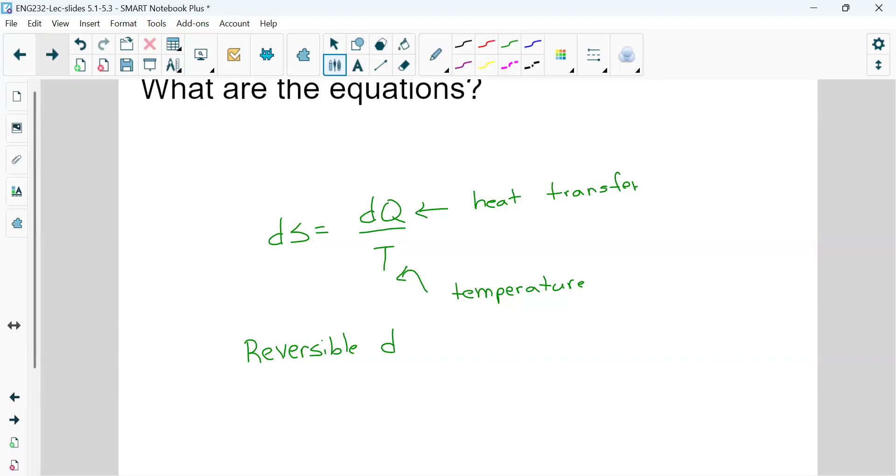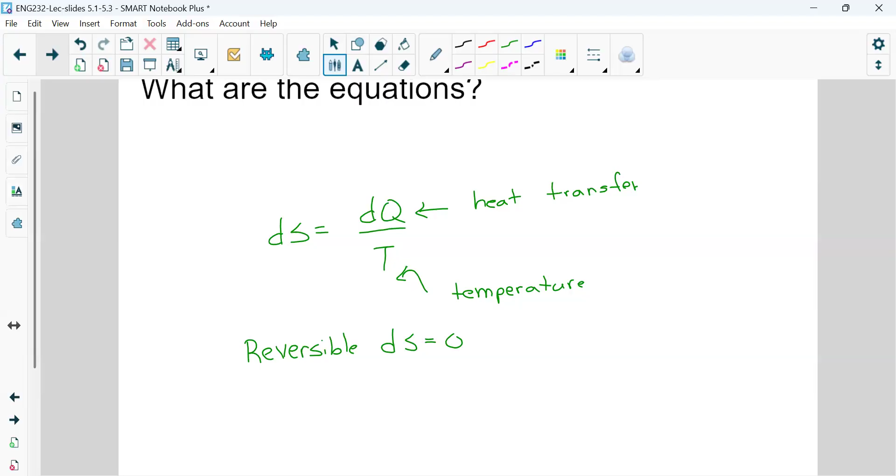All right, it's reversible, and I was right. When it's reversible, this is going to then equal zero. So if it's positive or negative, if our DS ends up positive or negative, then it's not going to be zero. If it's reversible, we can use this to figure out reversible systems. Now we have to be careful because it changes based on the type of system we are using.

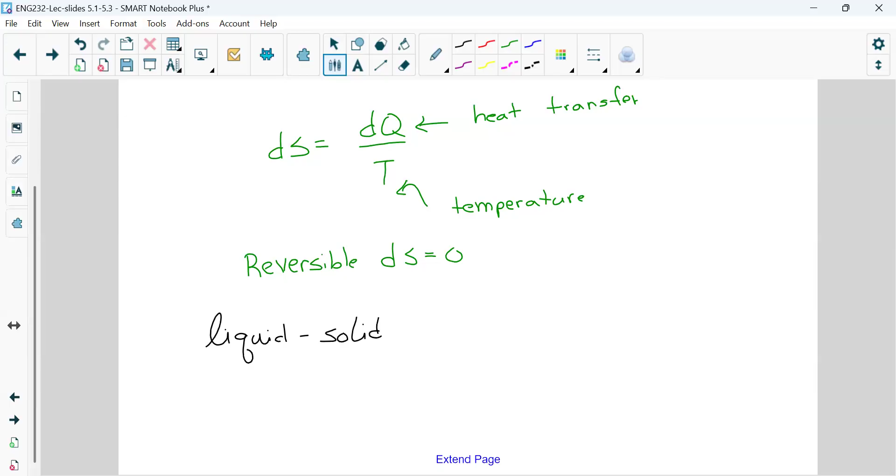All right, if we have a liquid solid system, then delta S is then going to be what I just wrote, dq over t, or we can find delta S as dq over t. That is not usually the way we write things, all right? If everything in that equation goes to zero, let's write it out, because we want to rewrite this in another way.

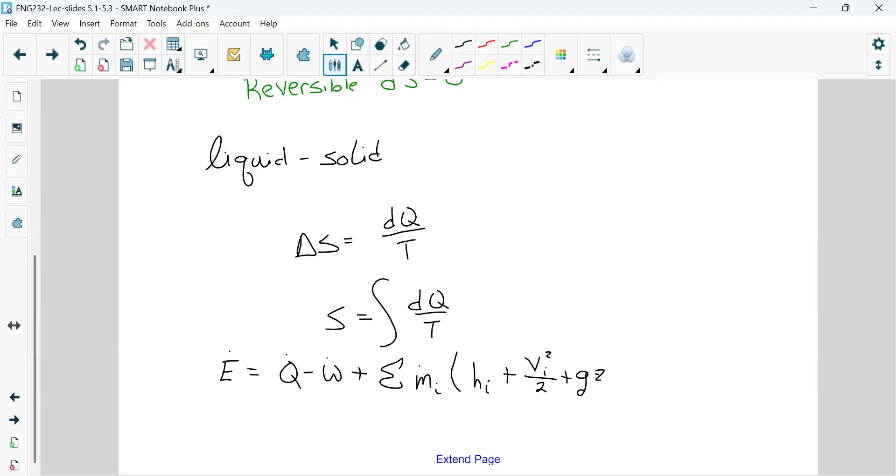E dot equals Q dot minus W dot plus M sub I, H sub I. If we are strictly looking at a heat transfer happening, steady state, that's going to be zero. If it's a heat transfer only, all of these terms are going to go to zero for me. All right, so that means my Q is directly then related to M dot H dot, or you could think my Q is then going to be my internal energy.

Is it asking, if you said if it's a heat transfer, that's when those things go to zero? Right. Liquid to solid, or solid to liquid. Okay, so we already know something about this H here, don't we?

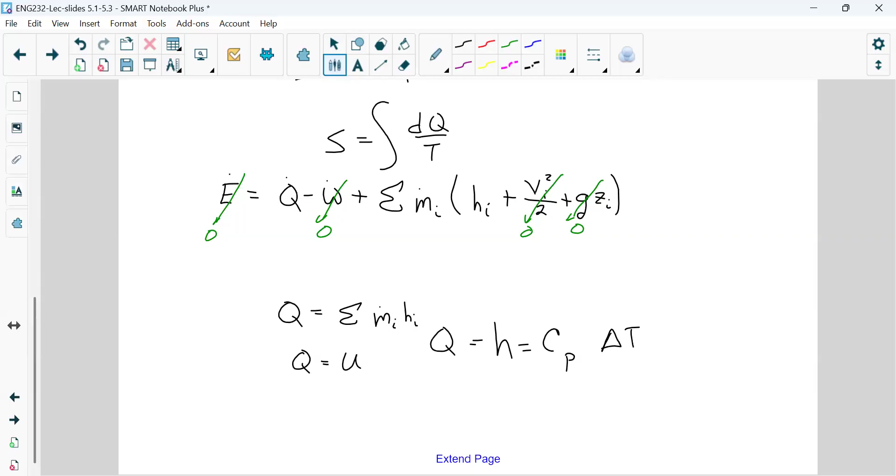But you said it was CV. It's CP. That's right, it's CP. H just deals with CP or CV? CP. Internal energy is CV, right? Then this is then the change in temperature, right? So if we're saying we're dealing strictly with a heat transfer situation, this is then going to be Q, because Q is only involved with the internal energy.

The reason I went through that is because now this is something that is solvable, isn't it? We can integrate that, can't we? All right, or you can also write it as this: the change in S is also then the change in H over T.

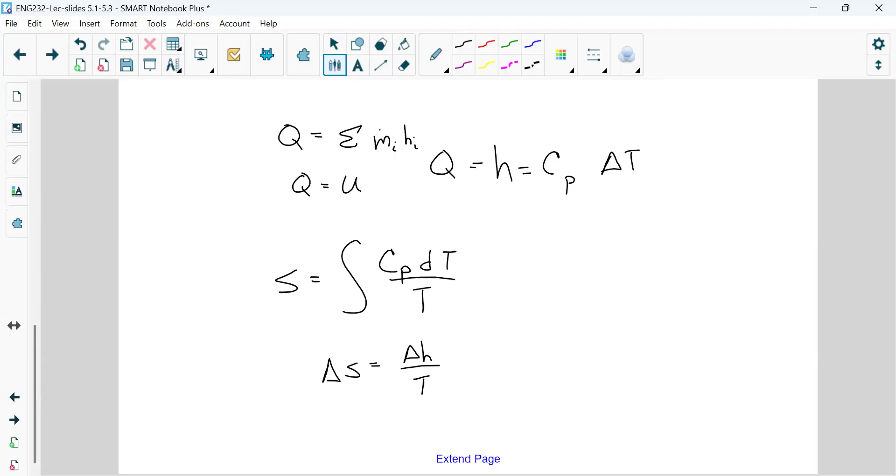All right, so we're out of time. I don't have enough time to do a problem. Do I have a problem prepped? All right, so we will do some problems out of the beginning of chapter 5 then on Thursday.

So since entropy always increases, is delta S always going to be positive? Okay, so the answer to that question is no. Entropy always increases in terms of the universe.

Okay, so if I put my pot of boiling water out on the counter, right, the entropy of the water itself is going to decrease. Right, but the entropy of the air around it ends up increasing, exactly, because heat went into the air.

Okay, all right, so when we say entropy is always increasing, we're talking about a universal entropy. So where one decreases, something else has to increase. It has to always balance out.

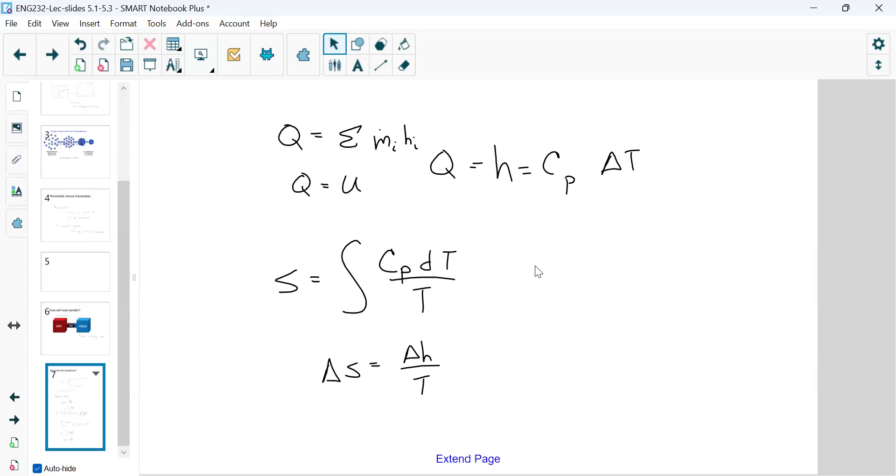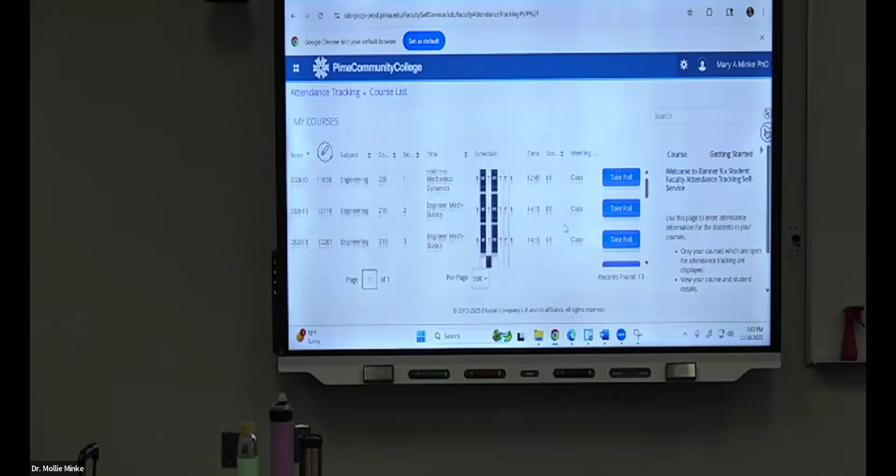Okay. That's it, yeah, we'll put it in the pile that already got started. Oh, don't put it in the statics pile. I know, okay, you told me to come to you. I just finished it. Oh, I took attendance, I want to make sure I got you.

Very well, so I had a question a long time ago. Remember the career fair event where you said it was extra credit? Would it be possible for me to share, like, I went, like the image with you, right? Like what I... yeah, send me an email. Yeah, there was a thing to upload it. Yeah, I totally missed that. I'm sorry. That's okay. Well, thank you. You're welcome.